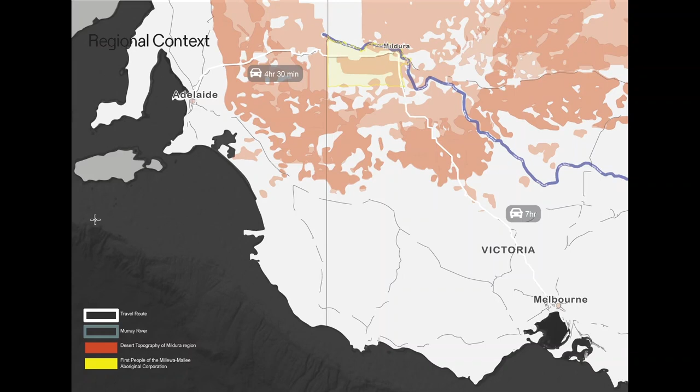So our response was very much about local resources, local suppliers, but as well as that physical distance, there's a big psychological distance to Mildura, I guess. One of the key drivers for the project was responding to the community's view that this had to be something of its place, and not Melbourne architecture imported into their community.

The CBD is not far at all from the site, but sits on an escarpment, so there's a full 2-level change to get down to the riverfront. This project is the catalyst for future redevelopment of the riverfront, and also about connecting the city back to its river.

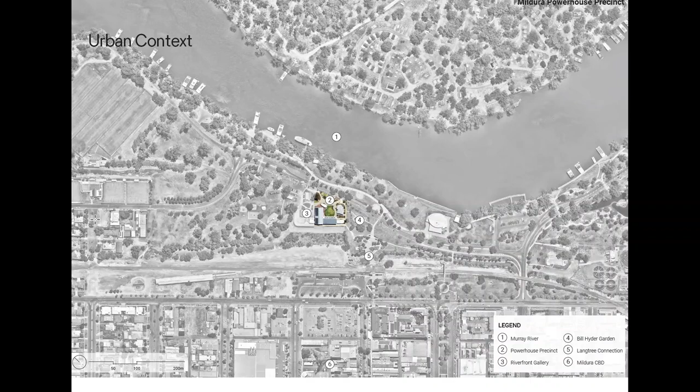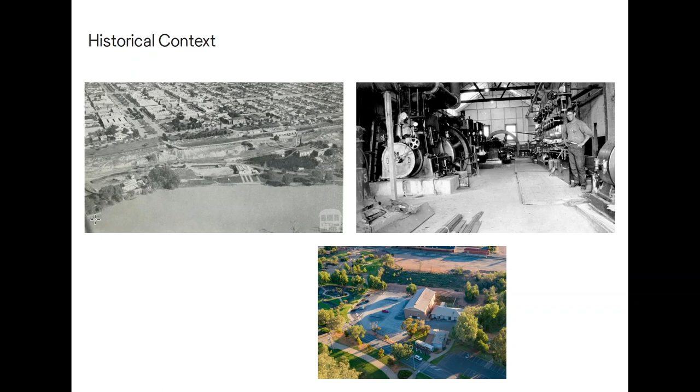The historical context is important too. This is part of a settler industrial complex that irreparably changed the wetlands of the river. It's culturally sensitive as far as the first people of the Millewa-Mallee are concerned. The local community have a real sense of pride in that technological innovation, but also a desire to centre Indigenous culture, which at this centre is through programming primarily.

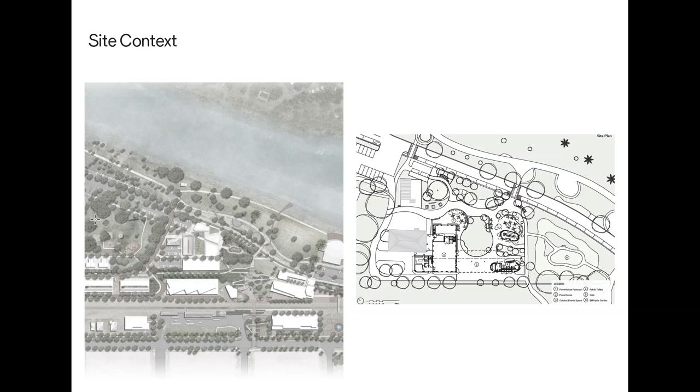But on appointment, we discovered that the community sentiment had really shifted since this had been endorsed, and there was a view that far less had to be built and that it had to be for locals. So we were supposed to be ripping on with the project—this is stimulus funding—but our project had a bit of an identity crisis.

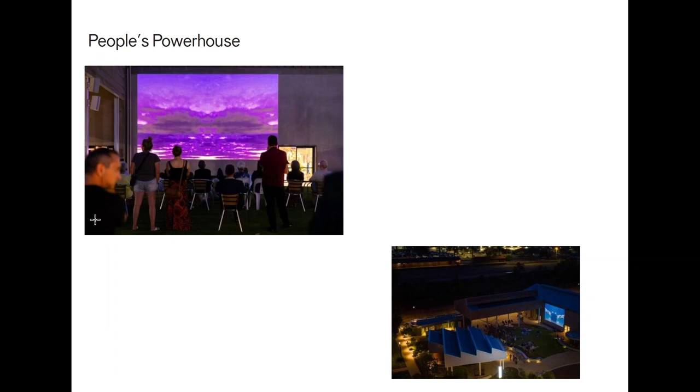So with council, it was really about saying, what is the broadest possible use of this place, and how do we put in place the macro elements to support that? Essentially, the most for the least in this place, and something distinctly Milduran.

Our design response really hinges around 3 big ideas. The first is from an industrial to a sensorial experience. So the powerhouse has a scale, a presence, and the thermal performance of an industrial building. An early move was to reinstate the ghost of the boiler house building, part of the powerhouse's companion on site that was long ago dismantled.

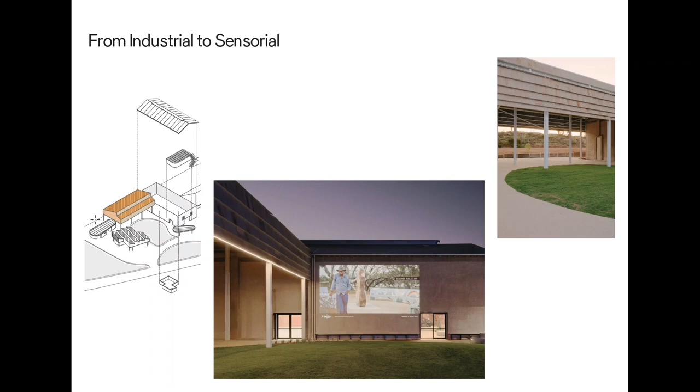The boiler house is clad in the leaking rusted roof sheeting of the powerhouse building itself. Those 2 vast roofs gave us the opportunity to turn this historically extractive complex into a restorative one, with solar arrays and batteries. So the powerhouse is now renewably powered.

Around these 2 mammoth structures, we slung a series of almost follies, and these are the first hemp public buildings in Australia. Again, for a project that had no ESD drivers from the client's point of view, it was really about low-cost strategies that we could bring the council and the community on a journey to support.

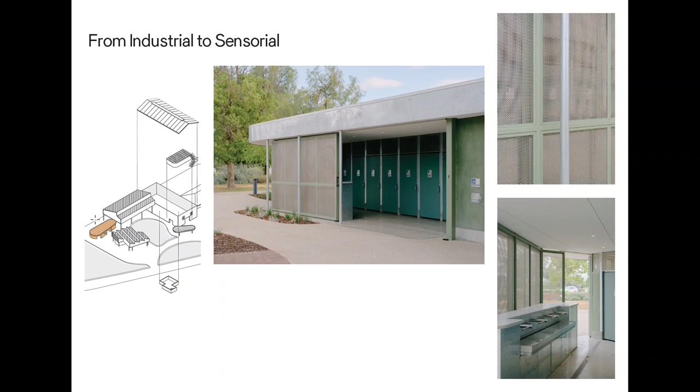This shift, I guess, from a kind of industrial complex to something much more haptic—having people engage with this idea of atmosphere and temperature and materiality through this play of mass, skeleton, skins, and luminosity. This is what the cast hemp looked like whilst curing.

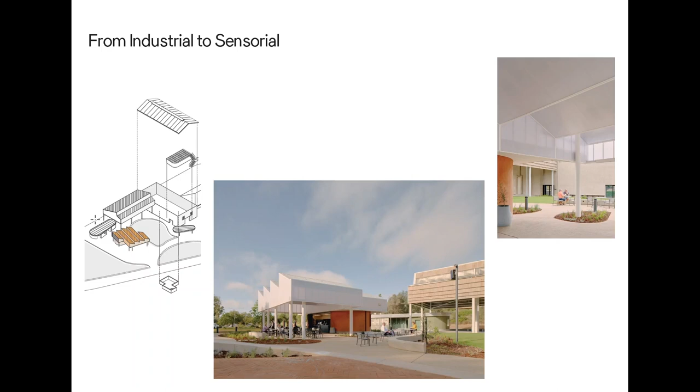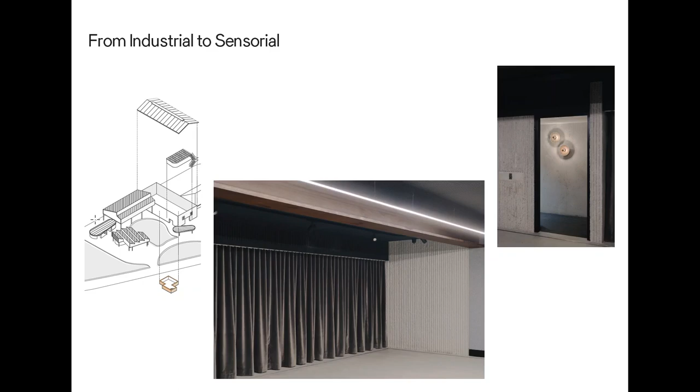And here you can get a sense of the skeleton and then the hemp mass nestled underneath it, and the extensive shade offered, both externally and internally. We tried to make sure that we used materials that had a nod to the past, that salvaged as much as possible from the site, but also had a textural richness that would reward the senses.

The next big idea was a shift from formality to informality. With the boiler house reinstated, we were approaching the kind of village green that the master plan had originally set out. That Eurocentric terminology was rejected pretty early on by the community, so there was this idea of a much more fluid and shifting ground.

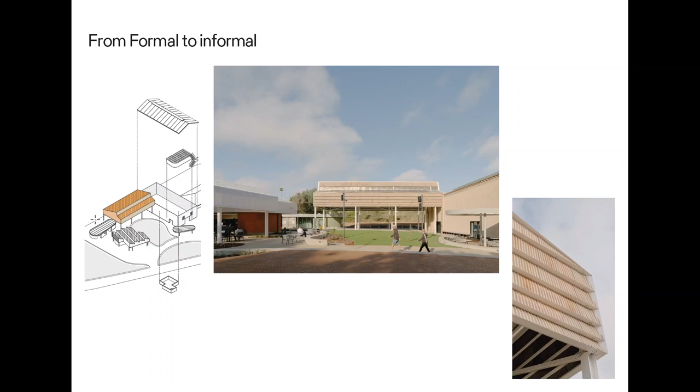Obviously in Mildura too, it's about being able to have deep spots of shade. And so the powerhouse itself blocks some of the really hot winds that bring red dust to sandblast the precinct, creating these spots in the lee and in deep shade for people. We were basically trying to use the least amount of built form possible to create pockets of space to be on the riverfront.

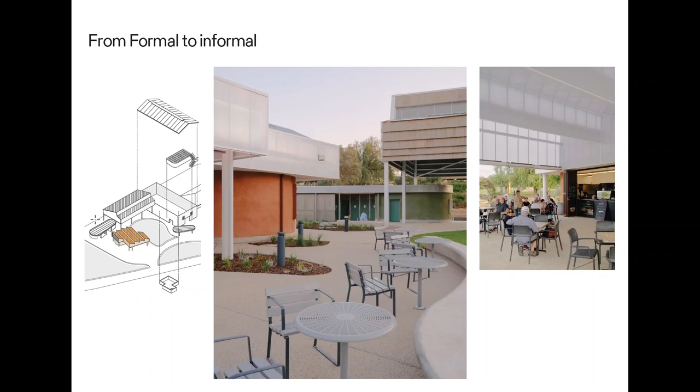It was also about making sure that this precinct could really work in the round, so it is the catalyst for change for the whole precinct. It needs to respond to community changes, but also to future development.

The riverfront at the moment doesn't have a lot of activity, and so CPTED, crime prevention through environmental design, passive surveillance, and a luminosity at night were really important.

Accessibility and inclusion is critical too, so there's a local social enterprise that works with intellectually and physically disabled people who occupy one of the small tenancies on the site as well. So navigating that shifting ground, making sure that we had really short travel times for people to all of the toilet facilities throughout the precinct was important.

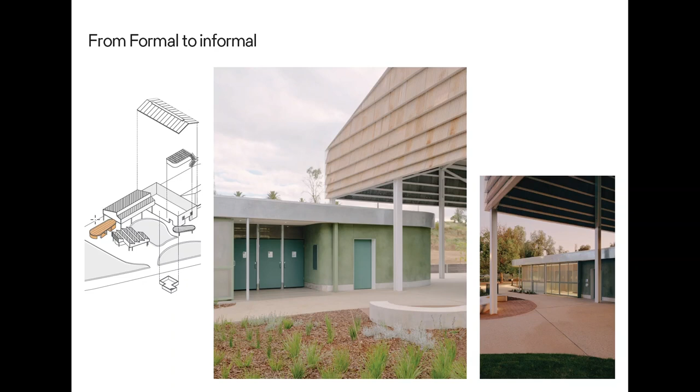And internally too, there's a flexibility and fluidity to be able to close down each of the discrete spaces and program them separately, but also to have them open up together. There's an operable glazed wall behind that curtain and a whole bunch of different skins and curtains that can provide both acoustic and visual privacy.

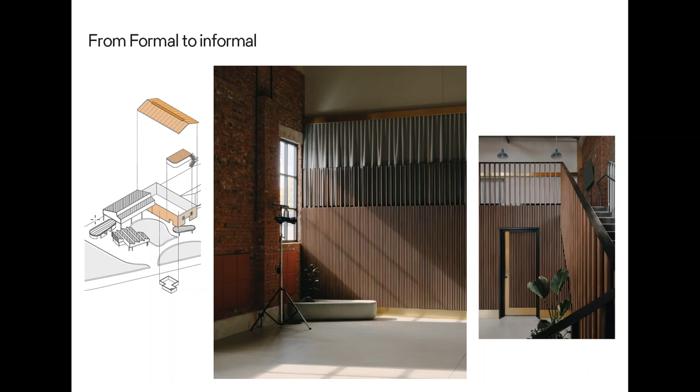The last big idea really is about the precinct needing to work from above. So this is the view from the city as you come down on the escarpment at grade. From a distance, you can just see the bridge heading over into New South Wales.

And that really drove this language of roofscapes. We talked to the local community about this as being hats, essentially, which makes a lot of sense to them. So, kind of rusted, patinaed hats.

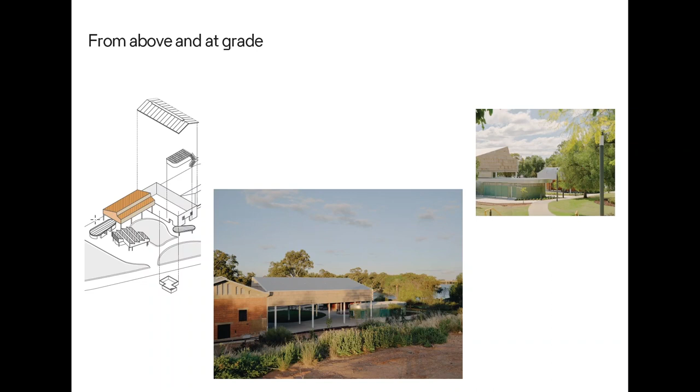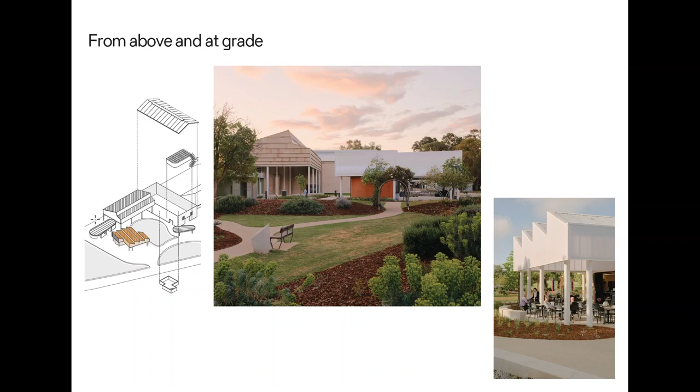The toilet building has a kind of open sky around it that works in terms of legibility and creating a sense of entry. And then the compressed sawtooth polycarbonate, which gives us the capacity to have this glowing beacon at the heart of the site that says, something has happened here, come and see.

So what has happened, we hope, and I think Council's really supportive of it too, is that this is a place now that is not just for the consumption of the community as had initially been set out, but really this kind of scaffold for the community to see themselves and come into conversation with each other.

At the opening, the Mayor said that Mildura finally had its own Fed Square, which, apologies to Don Bates and co, but I think is proof that this idea of a central space for everyone to come together has been delivered.